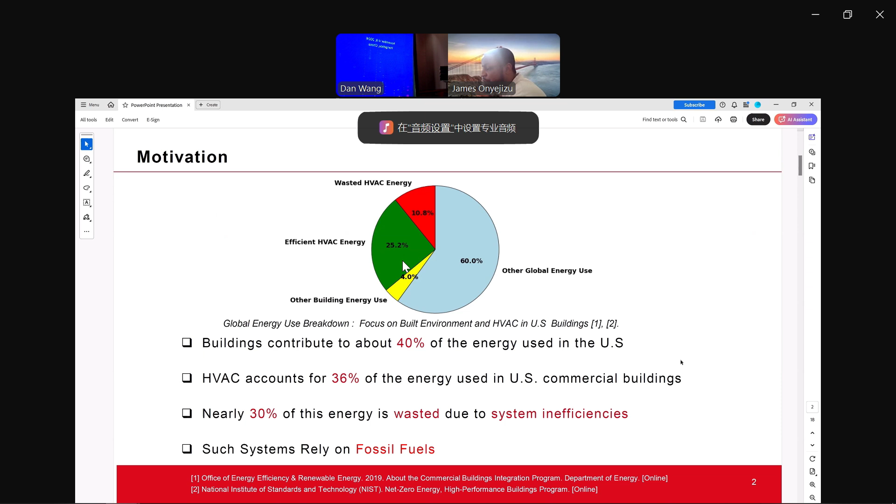To motivate this work, we start by mentioning that in general, buildings contribute to about 40% of the energy used in the US, and in particular, HVAC systems account for 36% of the energy used in US commercial buildings. Of course, 30% of this energy used by heating, ventilation, and air conditioning systems is wasted due to system inefficiencies, and this can result in great financial losses. These systems rely on fossil fuels, which produce tons of CO2 that can possibly lead to environmental degradation.

Now, one question comes to mind: what could be an alternative to such systems that rely on fossil fuels? One system we could use in this regard would be to adopt passive ventilation systems, which leverage external airflow without over-reliance on electromechanical systems.

Now, if adopted properly with appropriate control strategies, such passive ventilation systems can complement traditional HVAC systems and therefore provide significant energy savings through passive climatic resources for heating and cooling.

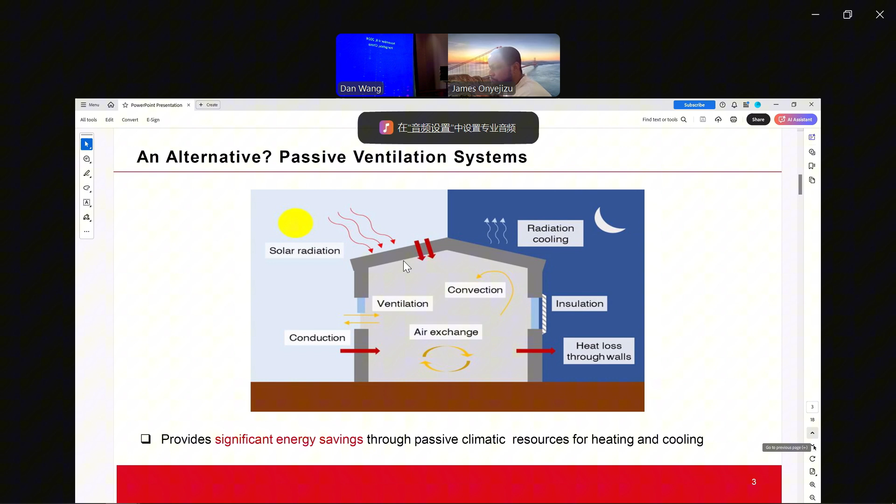Now, multi-zone buildings, on the other hand, present a complex challenge for energy efficiency due to the distinct thermal zones as well as the complex thermal interactions between the different zones. And based on this, a need exists to study the impact of passive ventilation systems on multi-zone thermal dynamics.

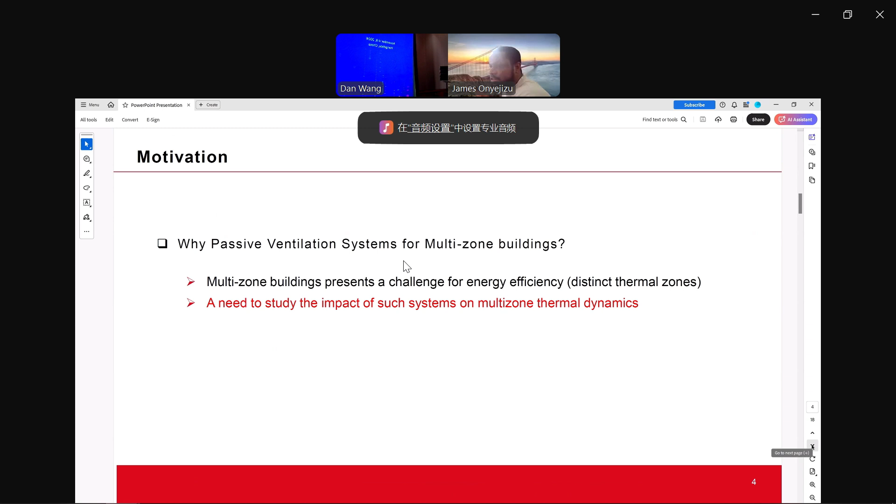Now, we summarize the key contributions of this work as follows. First, we develop a novel locally interactive bilinear flow model for passive ventilation systems. Next, we propose a novel two-step parameter estimation method for such systems. Finally, we study the impact of such systems on multi-zone thermal dynamics.

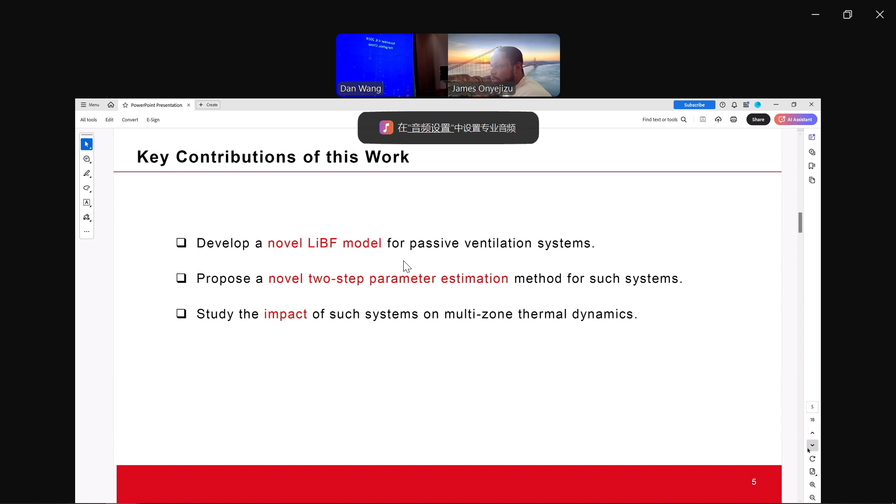Now, the locally interactive bilinear flow model adopted in this study assumes a graph-based structure where the state of the zone represents a node, and the relationship or thermal interaction between adjacent zones and the ambient represents an edge. Heat flow coefficients, known as thermal conductances, parameterize heat flow between adjacent zones as well as heat flow between a particular zone and the ambient.

Now, given a set of zones adjacent to zone I, the thermal dynamics of zone i is a function of the rate of heat change, which is basically a function of the thermal interaction between zone I and J, the thermal interaction between zone I and the ambient, as well as active heating or cooling sources.

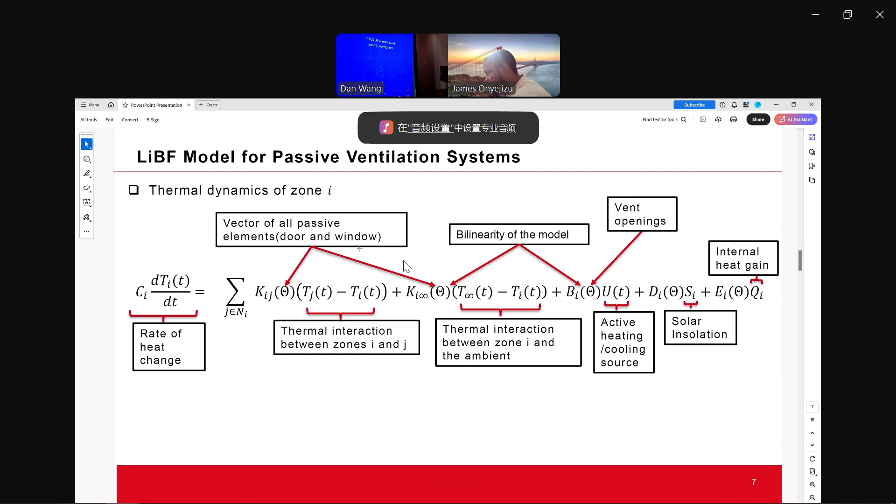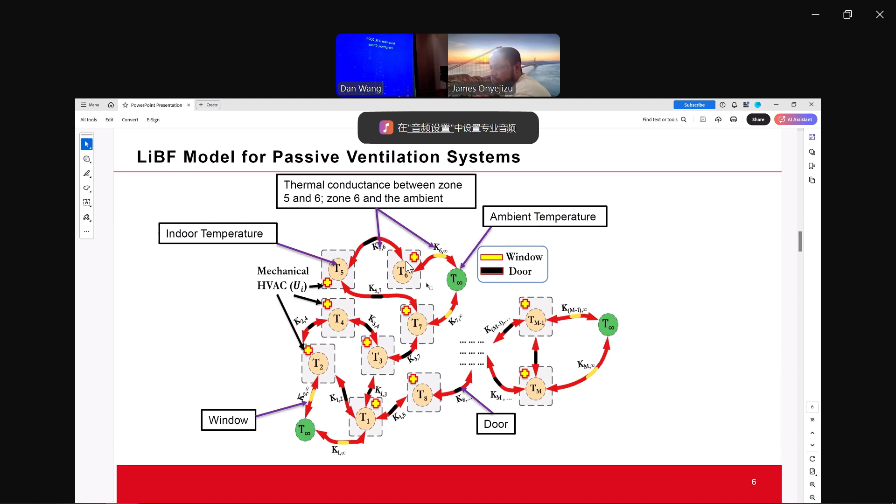Now, we note here that based on the LiBF model, we impose an assumption of local dependence of the system states—in this case, the temperature—on the passive elements of the multi-zone building. We say that the passive element in each zone directly impacts the temperature of that zone.

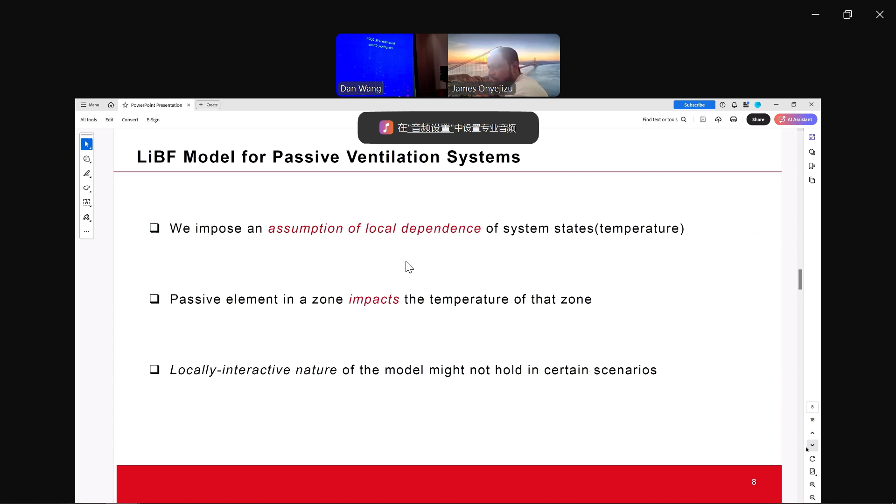Now, while this locally interactive nature of the LiBF model might seem natural, this might not hold in certain scenarios. In this work, we focus on assessing the impact of the window and door openings on the thermal dynamics of the multi-zone buildings.

Now, since the vent openings in our studies are constant, the term BI does not account for the dynamic changes in the vent openings. And Q here represents the internal heat gain. Now, the parameters from these models are estimated through measurements.

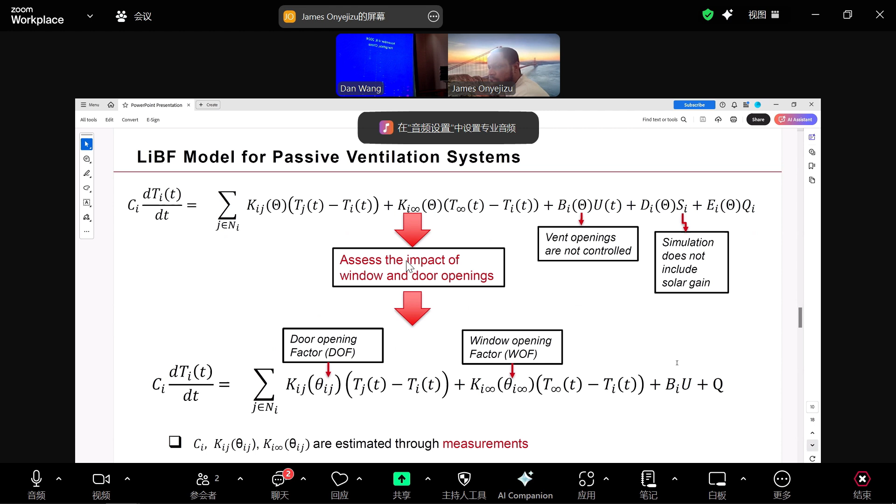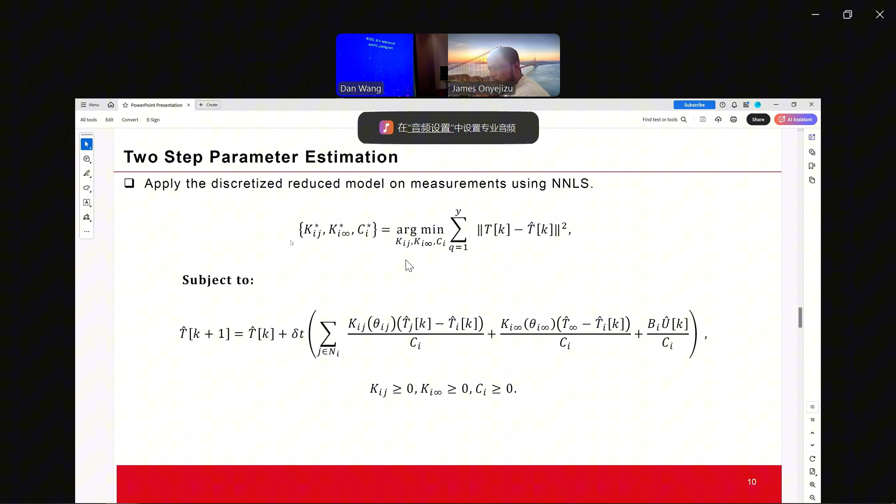Next, we introduce the novel two-step parameter estimation process, which involves applying the discretized reduced model on measurements using non-negative least squares. And then we develop a polynomial fit method, which is used to study the impact of different combinations of door and window openings on the thermodynamics of the building.

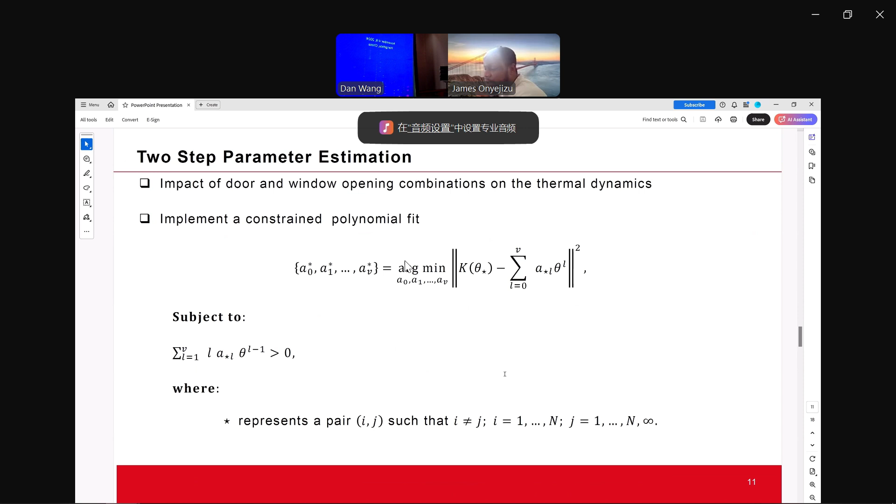For evaluation results, we considered an EnergyPlus model of a small office commercial building provided by the DOE. This model includes 4 doors and 2 windows, and the HVAC system consists of a centralized three-zone configuration with a single loop.

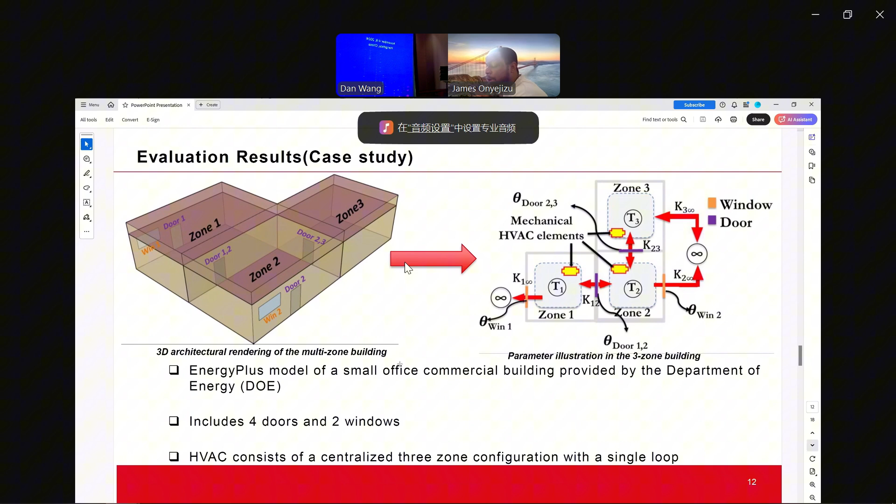Now, to evaluate the reliability of our proposed approach, we leverage the root mean square error values and plot the visual comparison of both the observed temperatures with the model predictions. Based on the RMSE values, we conclude that our locally interactive bilinear flow model can capture the zonal thermodynamics of multi-zone buildings.

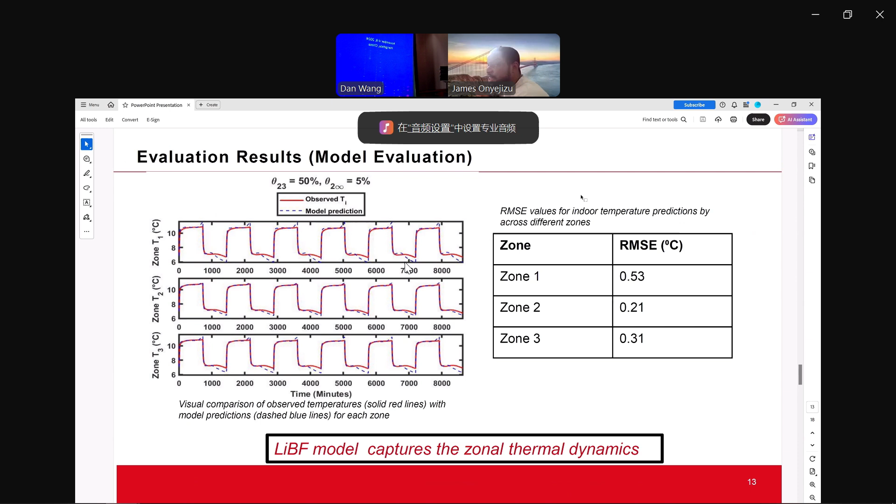In addition to this, we also study the effect of door and window opening factors on the thermodynamics of multi-zone buildings. Specifically, we keep the window opening factor fixed at 5% and open the door between zones 2 and 3 from a fully closed state to a fully open state.

Now we observe that as we open the door between zones 2 and 3, the thermal conductance between these zones increases, which implies interzone coupling.

We also note that the thermal capacitance of the three zones remains constant, which is kind of expected, since the thermal capacitance would only depend on physical characteristics such as volume and mass of the zones. Based on this study, we conclude that the LiBF model can capture the impact of passive control elements such as windows and doors.

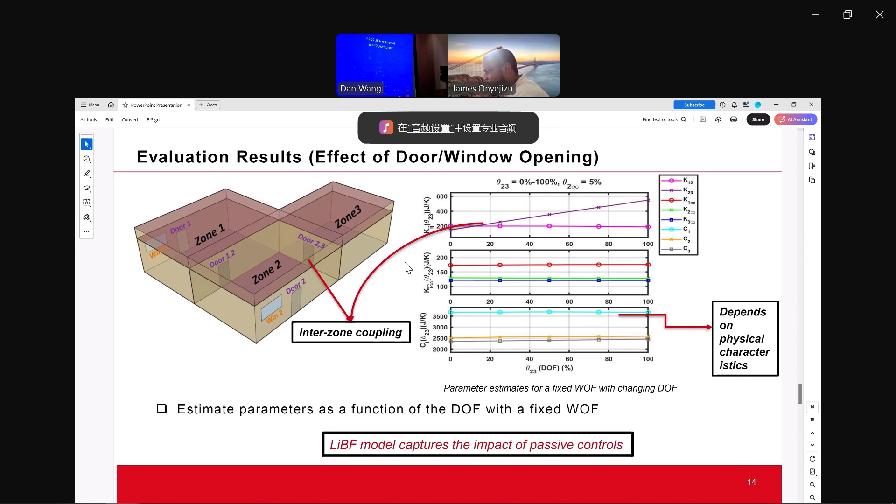The next approach involves evaluating the reliability of the two-step parameter identification method. The second step, as mentioned earlier, could be seen as a reduced complexity approach, where the goal is to identify the parameters for different combinations of window and door opening factors.

For this, we estimate the thermal conductance across the window opening factors at 2.5% increments for a fixed door opening factor. Next, we also estimate the thermal conductance across the door opening factor at 25% increments for a fixed window opening factor. Then, based on this, we fit an estimate using a constrained second order polynomial.

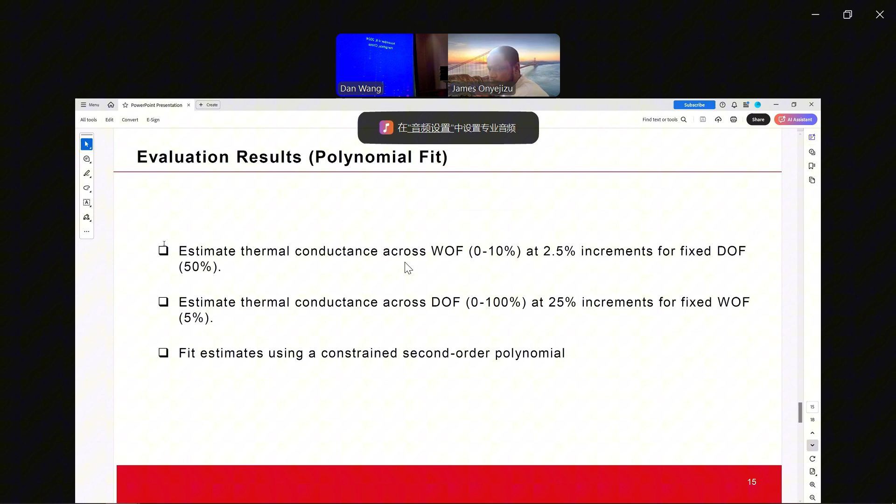And further, this is particularly important because the parameter estimation process enables model evaluation for...

Okay. Can you wrap it up? Yeah.

So in summary, this can be useful for fitting models to many passive elements where data collection for each combination is time intensive.